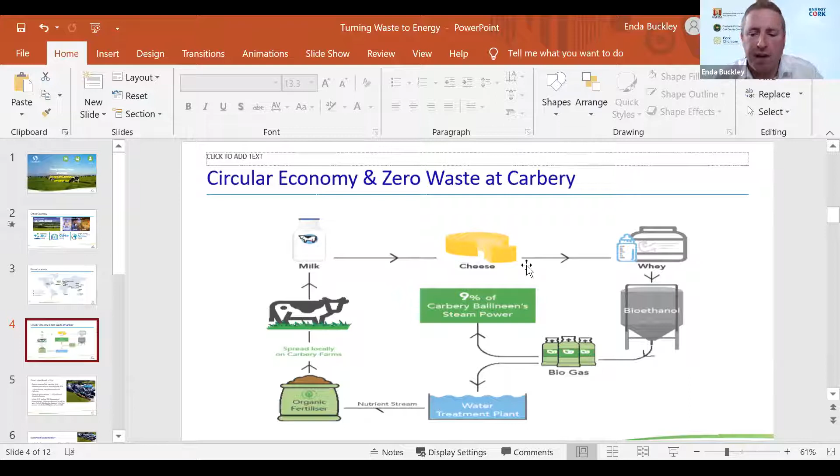So just a bit more detail on the bioethanol production. Like I mentioned, this was initiated back in 1978, way back. The process, which is known as the Carbery process, was later adopted in New Zealand and California and other places in Europe as well. The plant produces about 12 million litres per annum. And in recent years, we've kind of taken a different direction.

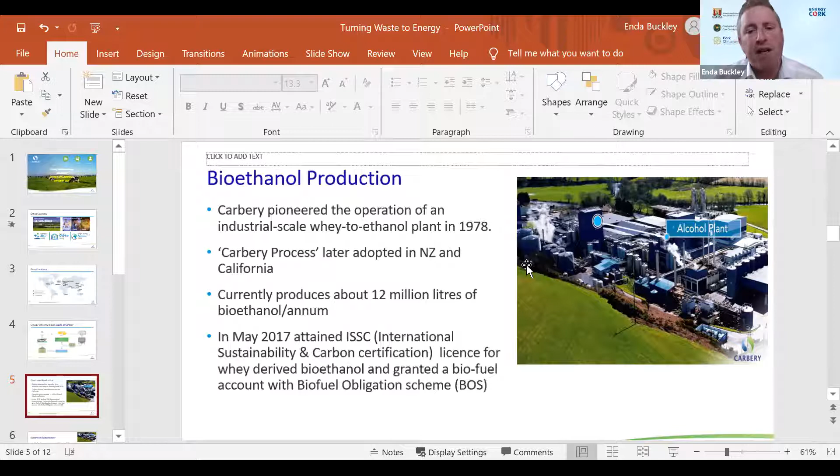We managed to obtain ISCC certification, which is the International Sustainability and Carbon Cert license for the whey-derived bioethanol. And we were granted a biofuel account with the Biofuel Obligation Scheme. Very closely after that, we were able to get double cert by NORA, which is the National Oil Reserves Agency. They identified whey permeate as a biodegradable waste, and we were able to obtain 2 BOS certs per litre on the back of that.

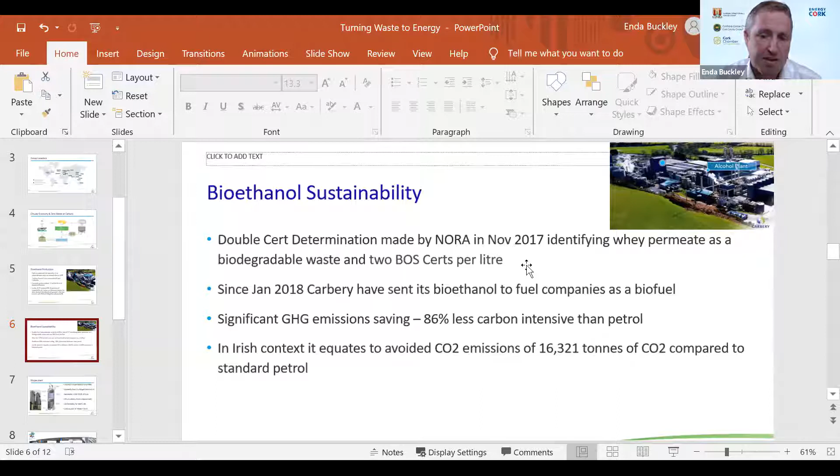So since early 2018, our bioethanol has been going to fuel companies, the likes of Irving, as a biofuel. And there's a significant greenhouse gas emission saving. Bioethanol is the biofuel for petrol, and Carbery's bioethanol is 86% less carbon intensive than petrol. In an Irish context, that equates to about 16,321 tons of CO2 compared to standard petrol. So it's a very sustainable biofuel.

Moving on to just a little bit of info on the biogas. The original anaerobic digestion plant was operational in Carbery since 1982. I'm led to believe that was the first commercial scale AD plant in Ireland. That was later upgraded to a Paques system back in the late 90s. You can see it there on the left. That's a picture of the 2 Paques bioreactors that we have in Carbery. They generate about 7,300 megawatt hours of heat annually at Carbery, so about 9% of our steam requirements on site.

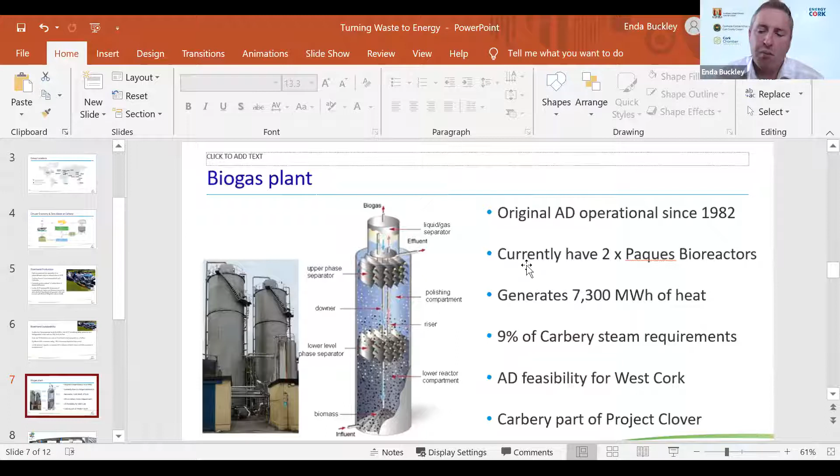The other thing I'd say on AD, we've commenced and we're coming to the final stages of a feasibility for AD for West Cork. We were fortunate to get innovation funding from GNI for that, which covers the lion's share of that. We're also part of a project called Project Clover, which is aiming at really trying to establish a biomethane industry in Ireland, along with the likes of GNI and RGFI, etc. You touched on it, Jerry. Our sector, if we're going to decarbonize, we really need biomethane, and we'd strongly be arguing for that.

Just moving on, and this is linked as well to the AD piece. What you're looking at there is a grass biorefinery. This model was developed by a company called Grassa, who were one of the partners in a project called Biorefinery Glas, which was led by Helena McMahon and James Gaffey. You present cut grass to it, and it basically develops 4 co-products from the process. One is press cake, and you can see it looks like lawn cuttings in the very foreground. That's what the press cake is.

The grass is presented, it's got a joint extruder and press as part of the process, and it essentially squeezes all the liquid and moisture out of the grass. So you're left with the press cake, you ensile that. That's a winter feed like silage for your cows or cattle. The other resultant stream is a green juice, press juice, and there's 3 different co-products within the press juice. One is a protein concentrate. It's ideal for monogastrics, and as part of this project, it was fed to pigs with very good results. Basically a soy replacement.

The next part is the FOS, fructooligosaccharides, which is a prebiotic that can also be mined from pressed juice. It was from this project we were able to mine significant volumes of FOS. And the last part, which is relevant to AD, is the grass whey. The grass whey can be a biostimulant. And again, as part of the project, we showed that it actually has similar qualities to a farmer's slurry, similar biostimulant qualities.

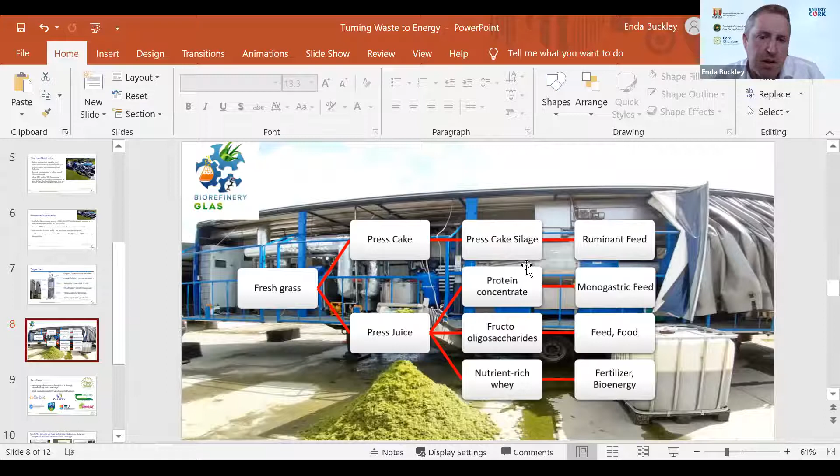The last piece I'm going to mention, guys, is a project that we initiated nearly 2 years ago now. It's called Farm Zero C. Basically, we're developing a climate neutral dairy farm at Shinagh, which is owned by the West Cork Co-ops, just outside Bandon. We initially made an application under SFI, under the Zero Emissions Challenge. Jerry, you'll be familiar with this one as well. So you can see the partners there. Biorbic are leading the SFI call. We've also made a submission to the Farm to Fork Horizon 2020, and we're leading that one ourselves. So it's an exciting project, and they're our partners.

And just to give you a feel for some of the work that we have been doing. In the last year, we've looked at seaweed additives, mixed results, to be fair. We're getting anything from 0, and there was an issue with the bioactive not being present, all the way up to 40%. And there's recent work from the States showing you can get up to 80% methane reduction from seaweed additives. So it's a very exciting space. We're working with chemical amendments for slurry, which basically stabilize slurry and ensure that there's no emissions from the slurry.

We've done a lot of work in carbon, basically sampled the whole farm paddocks for carbon. The initial piece is to obtain a baseline, but we've also worked with a company called Carbon Space and looked at satellite spectrometry, and that work is showing that we actually might have more carbon being sequestered. And again, we're going to validate that through the work we're doing on the ground.

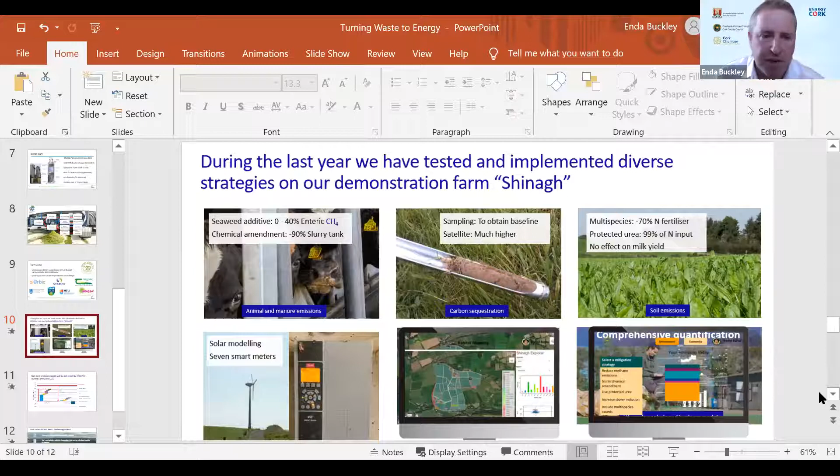And the last part then is LCA, which is the whole science underpinning this. So life cycle analysis, again, extensive modelling. The guy in the picture there is Alejandro Vergara. He's an Ecuadorian LCA expert. He's been really, really good for the project. And we're also looking at business cases because whatever we're doing here, we want to see this replicated throughout dairy farms. So that just gives you a feel for the various interventions.

A feel here for the roadmap. We think we can achieve this by 2026, 2027. We're looking at 3 phases. The farm is already a good bit ahead of the national.

So the national average is about 1.12 kg of CO2. We know the Shinagh farm is down to 0.85. And you can see, and again, this is quite simplistic, but it gives you a feel for the interventions that we're looking at to bring this farm to climate neutral.

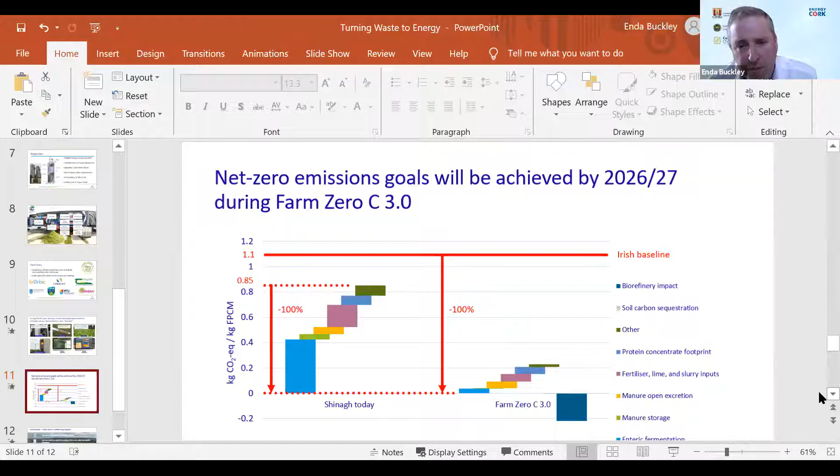And a big one, of course, will be enteric fermentation, but you can see other ones there like manure storage, we're looking at protein concentrate in the feed, soil carbon sequestration. Again, there's very encouraging trends there. And the grass biorefinery is going to have an impact. That's kind of phase 3. And you can see there on the right-hand side of that graphic, that would basically offset the final remnants really of the pieces that will bring us to climate neutrality.

So just to sum up, I guess we feel that the farm and this project is placing the farm at the center of the solution. I suppose we built the solution foundation, and we believe it can be rapidly rolled out to farmers in coming years. Definitely this could transform agriculture, certainly dairying, and provide a bright future for farmers in rural communities. It'll certainly help Ireland to meet and exceed EU targets.

We saw the revised climate bill last night. This thing can't come fast enough, really. And we believe it can be a beacon for sustainable agriculture.

And that's my bit, Jerry. Thank you very much, and a fabulous presentation. Great breadth. The circular economy at the facility is excellent, and that project sounds very, very interesting. The Farm Zero. Great to measure these values.

So we'll go straight on to our next presentation, which is from Conor Jones of Indaver. Conor graduated from UCD in 1996 with a degree in chemical engineering and joined Indaver in 1999. He has 20 years experience in the development of waste to energy plants in Ireland and the UK, was actively involved in the development of the Carranstown waste to energy facility in County Meath, is currently working on the construction of 2 waste to energy projects in the UK with Indaver, and is exploring how to best utilize energy generated from these plants with a particular focus on hydrogen and district heating.

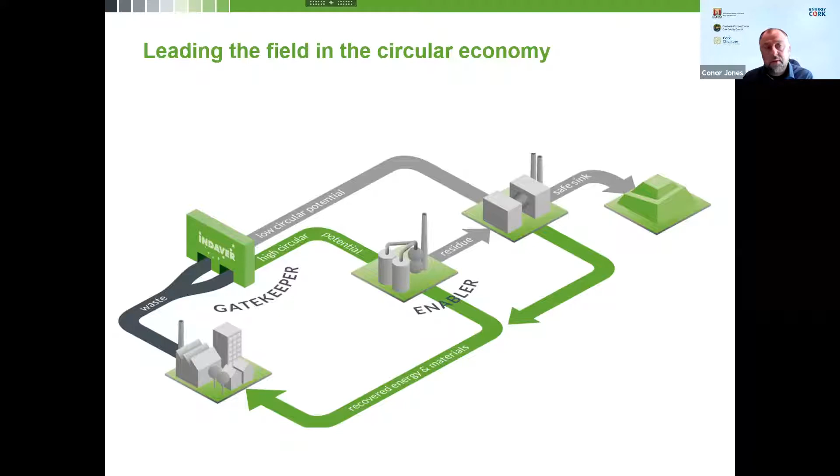And in the context of waste to energy, not only is waste diverted away from landfill, but we also recover valuable renewable energy in the process, and metals, and also have the potential to recover other materials from bottom ashes for reuse in road building, etc.

So what are we going to cover today? It's just a quick whistle-stop tour of the existing methods for reusing energy from the waste to energy process, and that's primarily electricity production and combined heat and power. And looking at innovations and how this is evolving through the likes of hydrogen production and power to chemicals or sustainable chemical production.

So starting with waste to energy and electricity production, this is our facility in Meath, where we generate about 20 megawatts of electricity, and we export 17 megawatts to the grid. 50% of that is renewable, and it's enough electricity to power a small town of 20 to 30,000 people. So small in the overall context, but still a significant contributor.

But the fly in the ointment here, and this is a common problem in Ireland certainly, is that the levels of curtailment have been rising since the plant went into operation in 2010. So last year we were curtailed or switched off the electricity grid for about 1,000 hours, which is a very significant proportion of our energy production. And effectively that energy is wasted and it's lost. But we'll come back to how we're dealing with that later.

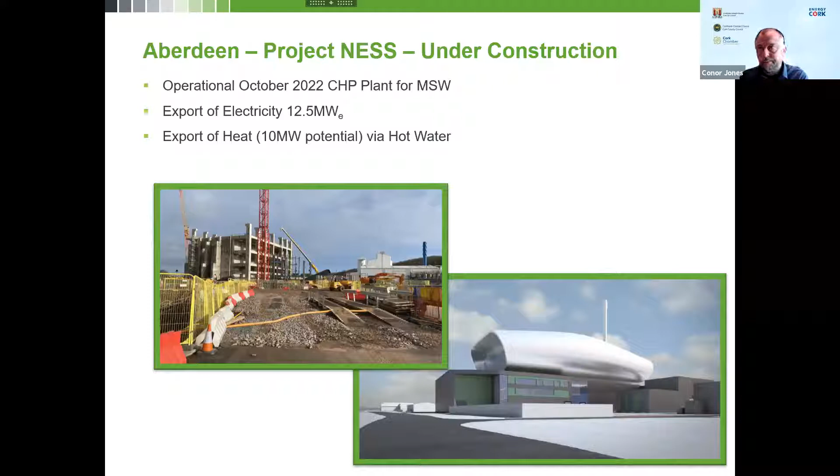So moving on to this project we did in the Port of Antwerp called Project Ecluse, commissioned in 2018. This was an industry-driven project where we've got a high concentration of energy-intensive industries in the Port of Antwerp that had their own steam boilers using fossil fuels, and effectively by building a 6-kilometer pipeline from our plant, which is producing 250 megawatts of steam, we were able to distribute 160 megawatts of that steam to them at high pressure for them to use in their own plants, replacing fossil fuel usage in their own steam boilers, and saving on average 100,000 tons of CO2 emissions per annum.

So a very good example of how it can be done in industrial clusters with steam, as opposed to just the traditional district heating or hot water networks that we showed for Aberdeen.

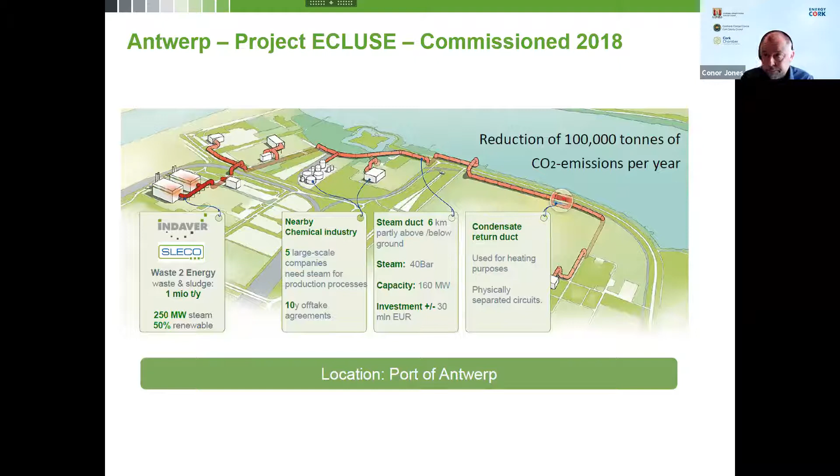So moving on to the innovations, I suppose this is the exciting stuff for everyone, and hydrogen is a big buzzword these days. But in the context of our plant in Meath, we've been searching for several years for ways to avoid the wastage of that electricity. It's an awful waste. It's about 10 gigawatt hours of electricity each year. So that bothered us greatly as a company, and we were searching for ways to utilize that wasted energy. And that search led us to hydrogen. We lodged a planning application last year for this project with An Bord Pleanála, and we're hoping to get a decision in Q4 this year.

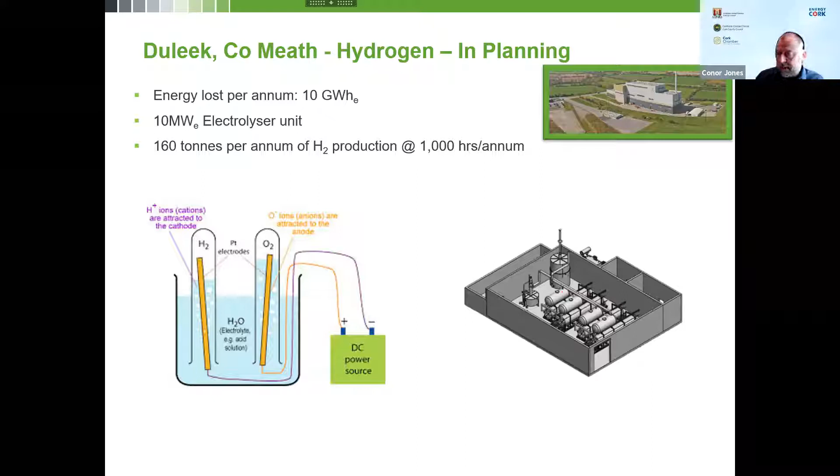The project itself is a 10 megawatt electrolyzer unit in 4 modules. There's a basic schematic of it shown on the screen, the 4 modules, producing hydrogen from the old lab method that you're probably all familiar with from secondary school, a little battery hooked up to 2 electrodes in water, splitting the water into its 2 component parts, hydrogen and oxygen. This is just doing that on an industrial scale in 2.5 megawatt units. This project would have the capability of producing 160 tons per annum of hydrogen, based on only that curtailed power of 1,000 hours per annum, but it could be run for longer.

So why hydrogen? We looked at lots of options. We looked at batteries, we looked at flywheels, we looked at lots of different alternatives, but really we kept coming back to hydrogen. And why? First of all, it's a very simple process. The technology is well established. It uses renewable energy to produce a clean fuel, which has become so important these days. And it also provides flexibility in routes to market for that fuel, albeit that those markets are only evolving now.

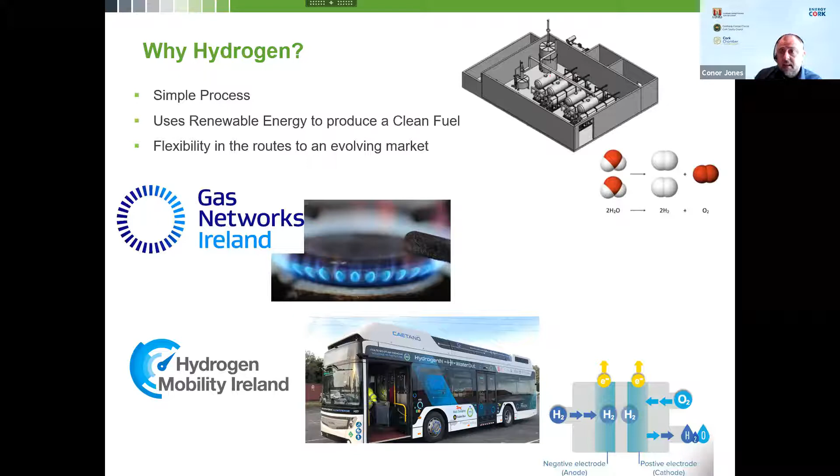We're really only at the beginning, and we've been talking to GNI about mixes and blending into the natural gas network. And there's a couple of pilot projects on the island at the moment. Hydrogen Mobility Ireland have one in cooperation with Dublin Bus, where they've purchased some buses powered by hydrogen. So it's clean in that you're splitting water into a fuel, which is hydrogen, and when you're using the hydrogen, you're converting it back into water. So it's a very nice closed loop. It's an exciting area for us. This will be our first hydrogen project in the Indaver group, and the first of this scale that we're aware of in the country at the moment.

So what's after that? I guess another further development of this type of innovation would be combining hydrogen production with carbon capture and usage, so CCU. So the schematic there on the screen shows the process using renewable energy to split water into hydrogen, and then capturing the flue gases from a power plant or from a waste energy plant, capturing that carbon and synthesizing methanol or ethanol from that to make a sustainable chemical.

This pilot project we're involved in here, again, it's in the port of Antwerp, and we're collaborating with several other industry partners to produce about 4,000 to 8,000 tons of methanol per annum as a demonstration project. So that project is starting this year, will probably be operational next year, but we'll be keen to watch that one to see its success in order to develop larger scale plants on the back of it.

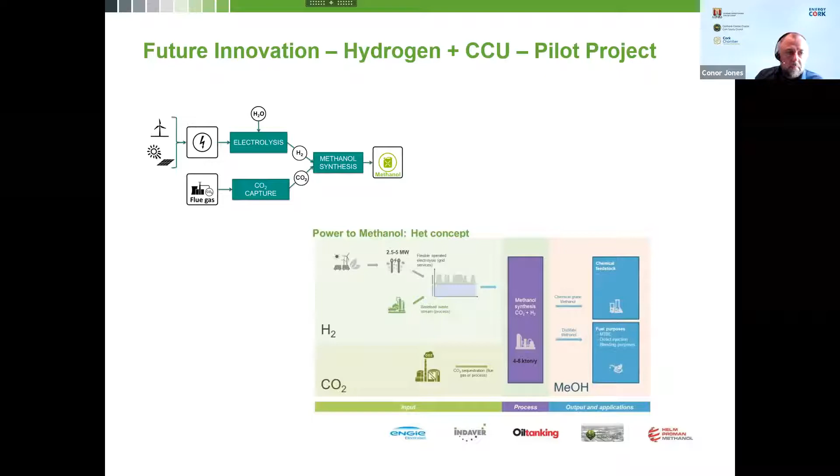But that's a really interesting one, and particularly in the context of the Port of Antwerp, where something like methanol or ethanol are intensively used as precursors for chemical manufacture. It's very interesting there in the port, in the circular economy space.

So just to sum up, I guess, going back to the start, the traditional methods of using energy from the waste energy process are still valid, and there's still a role for electricity production and for CHP. CHP via district heating networks or steam networks is still the most efficient way to do it, but not always possible depending on the location of the plant concerned.

But I think future plants for sure will have to be more innovative where CHP is not an option. I think that's really where hydrogen or combining that with carbon capture and use will become more important in the future. And thanks for listening.

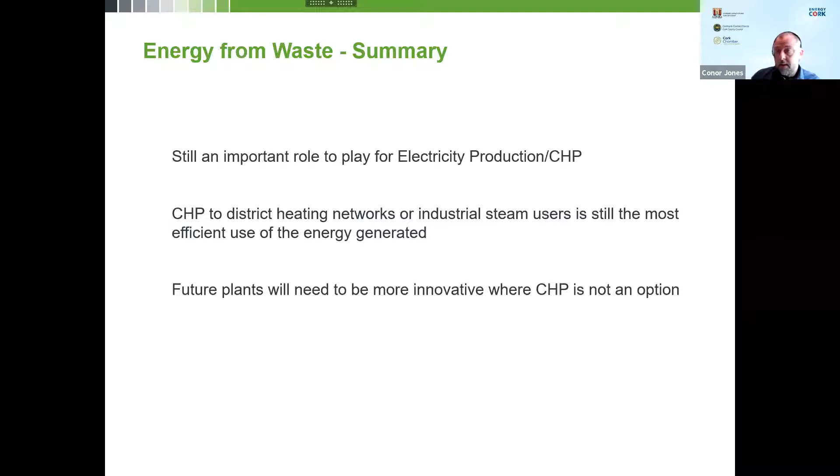Thanks very much. Thank you very much, Conor. A fabulous presentation. And I love the expansion into hydrogen and carbon capture and into liquid transport fuels, because we're not going to get rid of liquid transport fuels. And I do think a lot of utilities and developers need to look at the fact we're going to need liquid fuels.

And I think this leads us on very much to Niamh in Irving Oil. So Niamh is working in the area of strategic development with Irving Oil, based in Whitegate Refinery, Cork. Over 20 years experience in the oil industry with a number of varying roles: process optimization, process plant design, commissioning, project management, capital planning. Her current area of focus is sustainable energy, concentrating on decarbonization options within the refining sector.

Her remit covers areas such as renewable fuel production from waste, green hydrogen production and carbon capture, utilization and storage. She holds a bachelor's degree in chemical engineering from UCD. Over to you, Niamh.

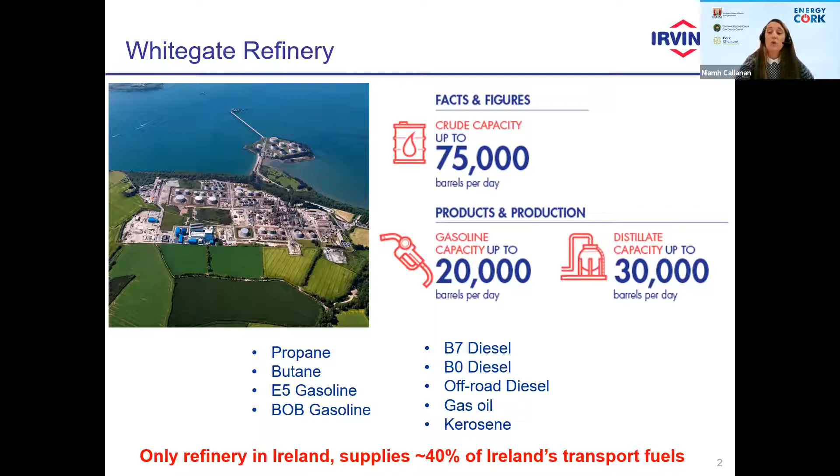So with that, just a little bit of background about the refinery itself. We're the only oil refinery in Ireland, and with that we supply about 40% of Ireland's transport fuels. We supply a suite of products: propane, butane, kerosene and home heating oil, and also then, as I say, transport fuels such as petrol and diesel for the Irish market. We're located in East Cork in Whitegate.

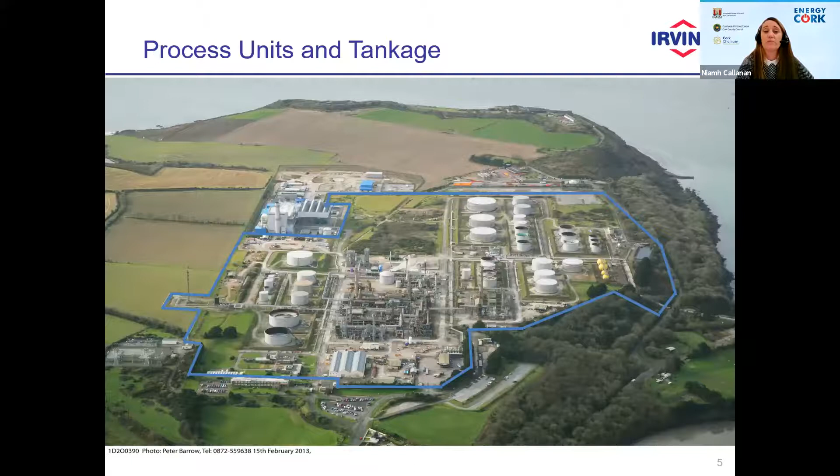So just to set the scene really in terms of looking at what the refining sector is doing in relation to renewable fuels, I thought I'd set the scene from a legislative perspective and look at what the driving force is behind renewable fuel production and what the future will look like. Most of you will be very familiar with the Renewable Energy Directive, the European legislation that covers the direction that Europe want to go in relation to renewable energy share within the energy sector.

The European Commission set a target of 20% for 2020, and Europe as a whole met this target. In fact, they exceeded this target as a whole. However, there were a few member states that didn't quite meet their target, Ireland being one of them. Ireland was set a target of 16% as our national renewable energy target, and we achieved 12% of that target. So it just sets the scene that we had ambitious targets set for 2020.

We didn't quite get there, so there's more to be done, and all sectors will need to contribute because obviously, as we heard yesterday from Minister Ryan, our targets and our ambitions for 2030 are more ambitious. So there's a lot done, but a lot more to be done.

Within that 16% renewable energy target, it's divided between three sectors: electricity, transport, and heat and cooling, which is really the building sector. And the area that I'm focusing on is really the transport sector target, and this is a mandated target of 10%. So 10% of the energy that's on the market must come from a renewable source. So Ireland achieved 8.9% versus the 10% target for 2020. So I'll just go on to show you how we achieved 8.9% against that target.

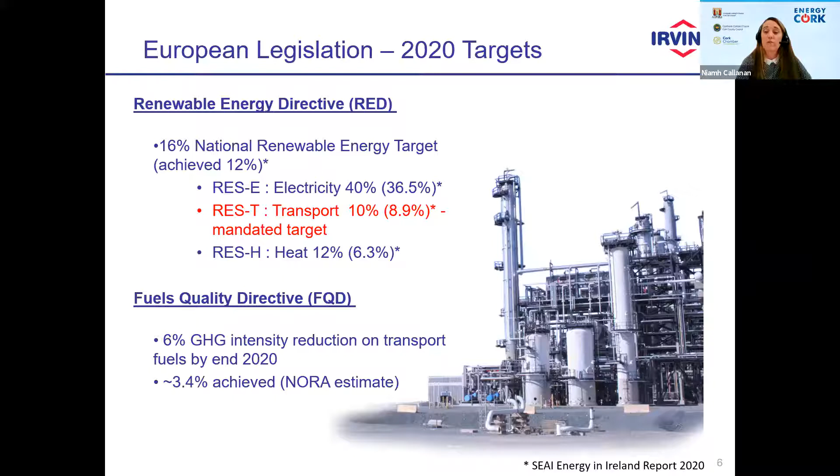Europe as a whole did not achieve this target by 2020. It fell slightly short of it, achieving just over 4%. Ireland hasn't released the final numbers, but it looks like we will achieve about 3.4% against this Fuels Quality Directive. So as I say, a lot more to be done in the area of increasing renewable content of our fuels in the transport sector. So that brings me on to what 2030 looks like.

And the Renewable Energy Directive was recast in 2018, and we speak about RED 2. And in RED 2, where Ireland had a 16% national renewable energy target, that has been increased to 24%, with the mandated target for transport set at 14%. This Renewable Energy Directive will be transposed into Irish legislation mid of this year, June 2021. But really, the ink will be barely dry on the page when we're actually going to start looking at what RED 3 looks like.

And that's really because no sooner had the European Commission agreed the terms of RED 2, they issued the European Green Deal in 2019, which set more ambitious targets than what RED 2 committed to. So that's where the European Commission has committed to a 55% greenhouse gas reduction rather than the original 40% that they had put forward. So with that in mind, RED 2 doesn't go far enough at 24% and a 14% target for transport. It will need to be revised upwards.

And we'll be looking at a renewable energy target closer to 32%, with an increased mandate then in the transport sector. So again, very much just setting the scene that it's going to be more and more renewable required in the transport sector.

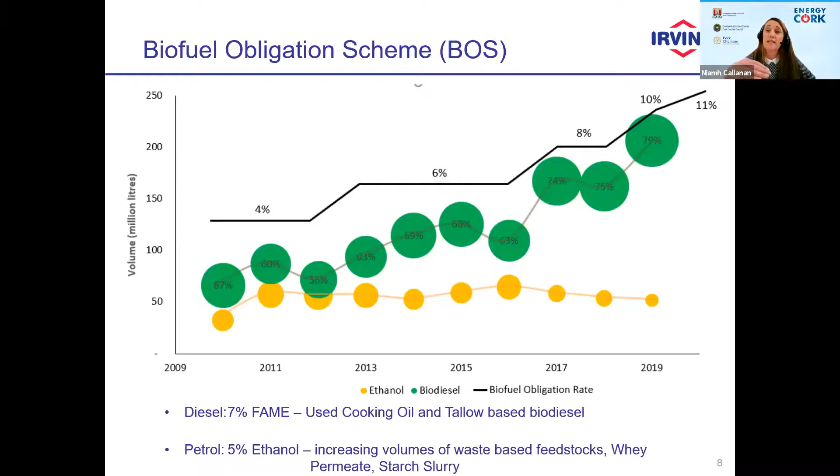So in order for us to push through and introduce more renewable into diesel, we need to introduce a renewable diesel. And I suppose you're just wondering what exactly is renewable diesel. It can be quite confusing to differentiate between the different terms of biodiesel and renewable diesel. Biodiesel is typically FAME and what I've referred to, and it's what we call a conventional biofuel.

And renewable diesel, you might have heard the name HVO. It's very often referred to as HVO, which is quite a poor name for it nowadays. It's hydrotreated vegetable oil, and it really stems because originally when it started to be manufactured, it was traditionally produced from vegetable oils, so from your soy oil, rape, palm oils.

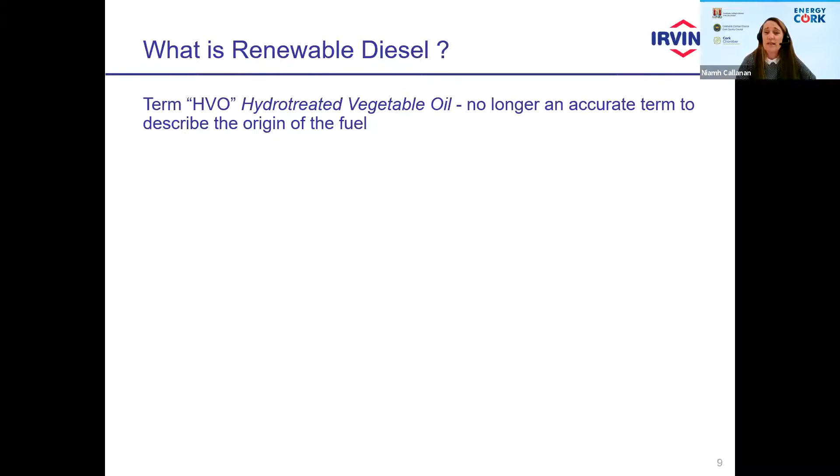That's really no longer the case nowadays, and more renewable diesel is now being produced from waste and residue fat fractions from animal fats. So in Ireland, renewable diesel will be produced from indigenous waste such as used cooking oil and tallow. Whereas in Scandinavia, they use waste such as tall oil and waste from the forestry industry. There's quite a lot of work going on in developing future wastes, and so you will see a lot more work in the space looking at more advanced wastes like algae and municipal wastes.

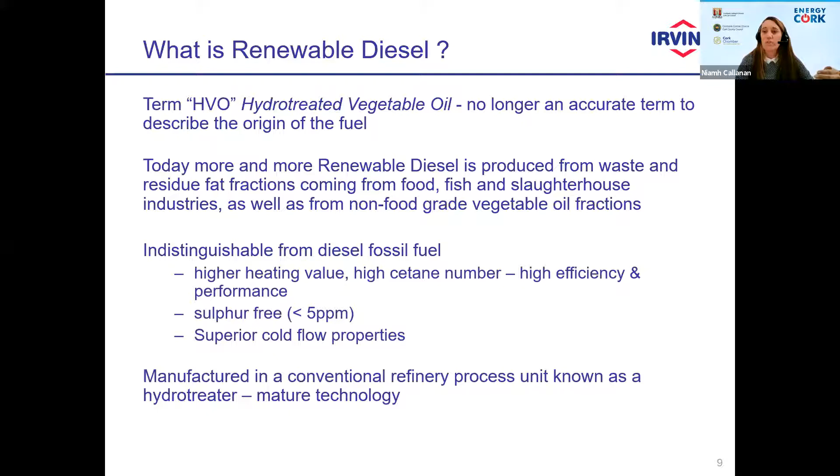One of the key benefits of renewable diesel is that it's indistinguishable from diesel fossil fuel. So unlike the traditional conventional biodiesel, there is no blending limits. So this can be added as a drop-in fuel to your fossil diesel and can be run at any percentages in your cars. It has some superior properties to it, so higher heating value, therefore leading to an improved efficiency and performance. And as I say, it's manufactured in a conventional refinery process, so it's very mature technology. So it isn't a technology that needs further R&D or further research. It's in conventional technology.

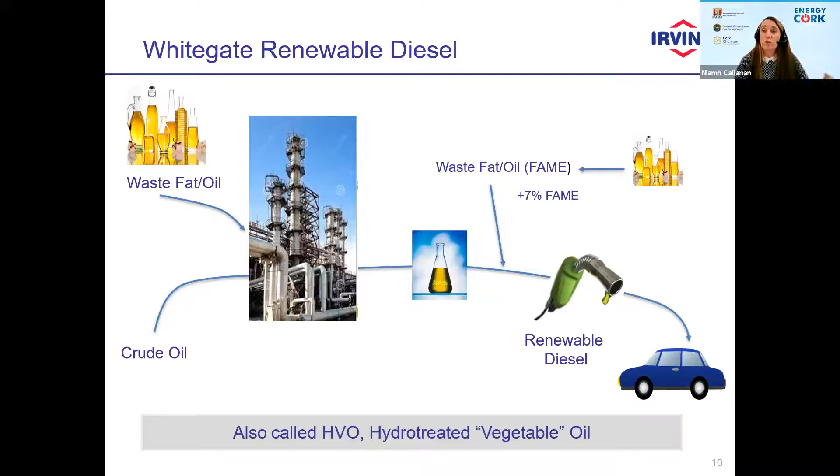So from a Whitegate perspective, the likes of used cooking oil or tallow can be co-processed along with fossil diesel in a hydrotreater unit, and can be made as a renewable diesel. FAME can be added, so biodiesel at 7% can be added to this and then sold on the forecourts, therefore increasing the renewable content upwards of the diesel that's sold on the forecourts.

So just in terms of benefits for renewable diesel versus fossil diesel, it reduces greenhouse gas emissions by up to 90%. So when you're using used cooking oil or tallow as a feedstock, you can exceed 90% greenhouse gas emission reductions. So it's really a great fuel from a CO2 perspective. As I say, there is no blend limit. It can be used as a drop-in fuel, so we can make blends of 10%, 20%, 30%, or we can indeed look at running

100% renewable diesel. And you'll find that a lot of the freight hauliers and the heavy goods vehicles are really looking at this as an option for them to convert their existing fleet of Scania and DAF and Volvo trucks over to run on a 100% renewable diesel rather than having to change technology. So that just plays into being able to use existing infrastructure. So the existing road transport and forecourt infrastructure can be used for sale of this product.

Niamh, again, may I ask you to finish up soon?

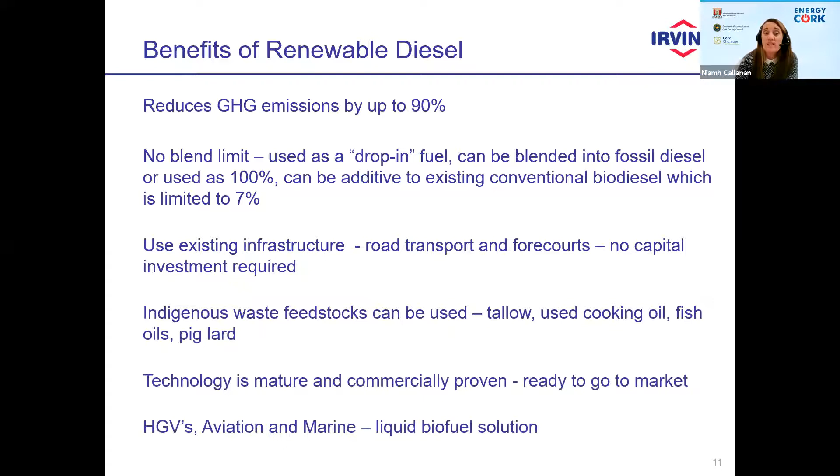Perfect. Yeah, thanks, Jerry. Again, indigenous waste feedstocks can be used, such as the tallow and used cooking oil, and the technology is mature. So finally, just to look at what it means in terms of relative greenhouse gas emission intensity, this is just a useful slide to indicate your typical new diesel car in the market operates with about 113 grams of CO2 per kilometre. And then as you can see, as you vary 20% renewable, you can look at petrol hybrids.

And when you look at those versus, say, your typical EV, obviously your electric vehicle in itself is a zero emission vehicle, but clearly you need to look at the life cycle of the emissions, and that is operating with a grid average from 2020 of about 50 grams of CO2 per kilometre. And then again, if you were to look at a 100% renewable diesel, you would be down around 12 grams of CO2 per kilometre. So all in all, a pretty good story in terms of liquid renewable fuels for the future. So that wraps me up, Jerry, in what we're doing in the transport sector.

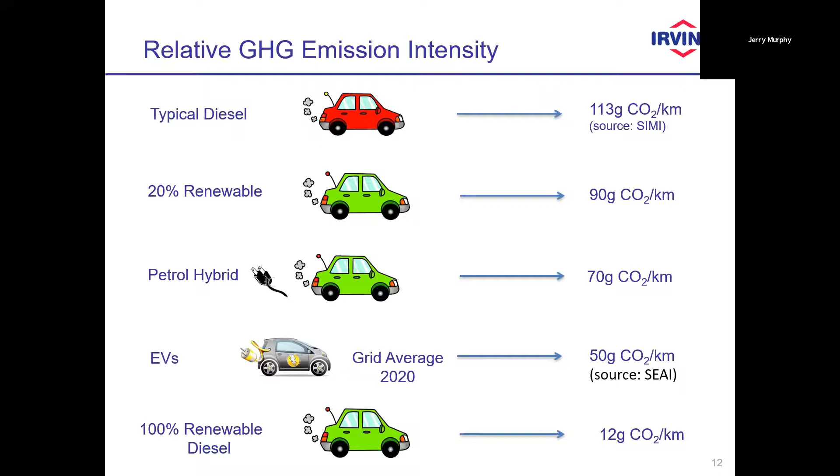Niamh is an innovation engineer at GNI. She holds a degree in geology and petroleum geology and is currently undertaking an MSc in project management in UCC. Niamh's experience has been primarily in the area of assessing carbon capture, storage, and biomethane as decarbonisation technologies for the gas network. Her current work is continuing to develop the business case for biomethane from agricultural sources in Ireland.

So in order for this to be realised, GNI's role is to support the producers in getting every unit of gas they produce onto the grid. And in doing that, we have two options. The first option is a direct connection. That is where a producer is close enough to the existing infrastructure that exists here today, and if it's economically feasible, we can extend the network via pipeline to their facility for direct connection.

But the reality is that an awful lot of our farming enterprises and farming clusters are in rural areas, and in a lot of cases it would not be economically viable to extend the network. So we introduced a concept of the central grid injection facility, such as our Project GRAZE up in Mitchelstown. What that does is allow biomethane to be collected from roughly a 50-kilometre radius. A truck would essentially go to a producer, take the gas away, bring it to this facility for injection. So the opportunity will be there for a lot more farmers than what would exist with direct connection alone.

So there are those two options. And by having this biomethane transporting throughout our network, it will offer a key solution for those hard to decarbonise sectors, such as heat, industry and transport.

As we continue to support the development of a biomethane industry here in Ireland, there are some key concerns that keep reappearing and they need to be addressed. One of those concerns is the sustainability of agri-AD. Would the introduction of anaerobic digestion here in Ireland upset the balance that exists in our current agricultural system? So with that in mind, we commissioned a report with the expertise of Devenish Nutrition and their research farm in Dowth, County Meath, supported by KPMG Sustainable Futures.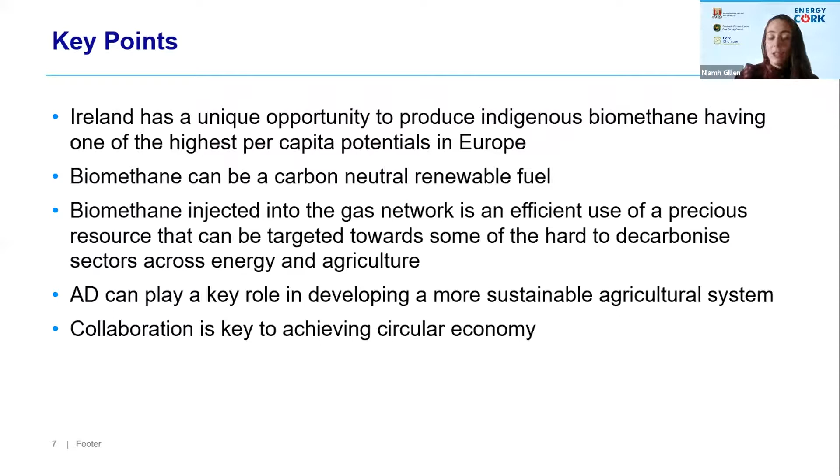So finally, I hope your takeaway from this is that Ireland has a unique opportunity to produce biomethane, that biomethane is a carbon neutral renewable fuel, and it will help to go towards decarbonising some of the hardest to decarbonise sectors here in Ireland, including agriculture. And collaboration is key to achieving circular economy initiatives. So that's for me. Thank you very much.

Thank you very much, Niamh. I really enjoyed that presentation, and I'm involved in the Biofuel project, so it's good to give it a little bit of advertisement. One thing I find about these presentations, it fits into the science of the leftovers and industrial ecology, and I do like that circular Russian doll type system of picking up layers and finding other elements. I'm going to pass you over for a quick 2-minute conversation with Thomas Mchugh. And Thomas is going to talk about a report written by Cork Chamber on anaerobic digestion.

Thanks very much, Jerry. I think it's really interesting to just come in straight after Niamh, because effectively what we did last year was to work with the Cooperative Centre in UCC to produce a multi-stakeholder report, really looking at anaerobic digestion. I suppose anaerobic digestion is challenged in terms of its storytelling ability. It's much more complex, and there's no two solutions the same, than for example something like wind energy or other stories that are comparably easy to tell.

And what we really wanted to do is just to raise awareness in government, raise awareness in stakeholders, and raise awareness in the business community about the huge potential that's there. The nice thing about AD is it is circular, and it can help to reduce carbon from the agricultural setting, as so well articulated by Enda earlier. But it also helps to create a more stable economic environment potentially in many rural settings. So there's nice unique aspects that AD can bring.